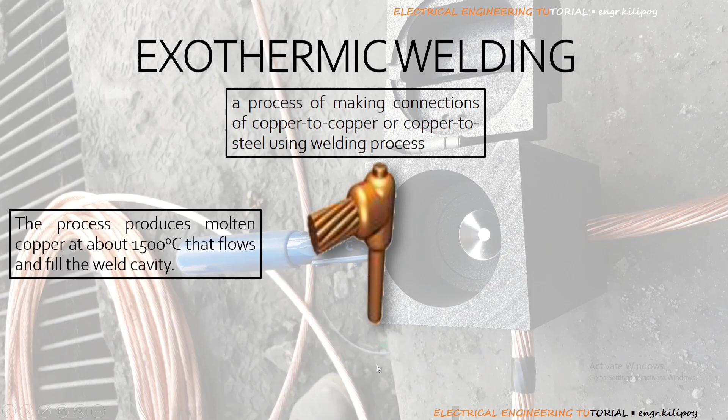...connecting the interconnection of the grounding cable or grounding conductor, and grounding conductor to grounding rod. This process produces molten copper at about 1500 degrees Celsius, which flows through the weld cavity. We will show later how it flows into the weld cavity. It has resistance to galvanic coupling and greater mechanical toughness.

What is galvanic coupling? It is a condition where two grounded systems are connected at multiple points, causing galvanic coupling. When you have galvanic coupling, there is a voltage difference between grounds, and given that voltage, there will be unintended current flows, which is very dangerous.

With exothermic welding, it resists that galvanic coupling scenario. The connection produces a molecular bond, called exothermic bonding, and that will not degrade over a long period of time.

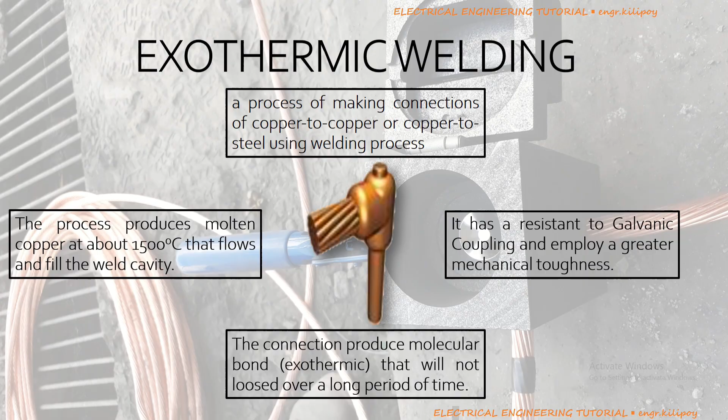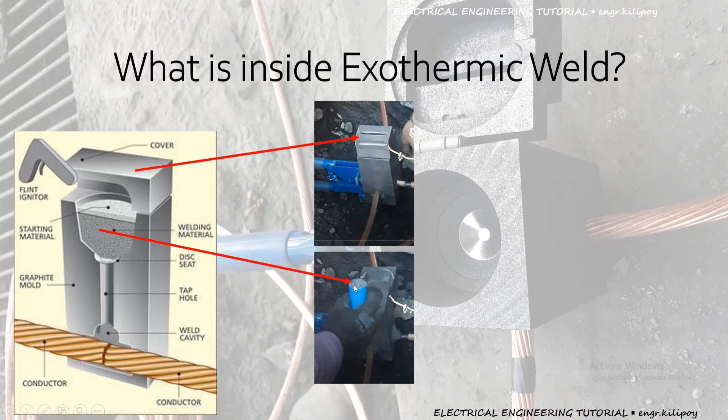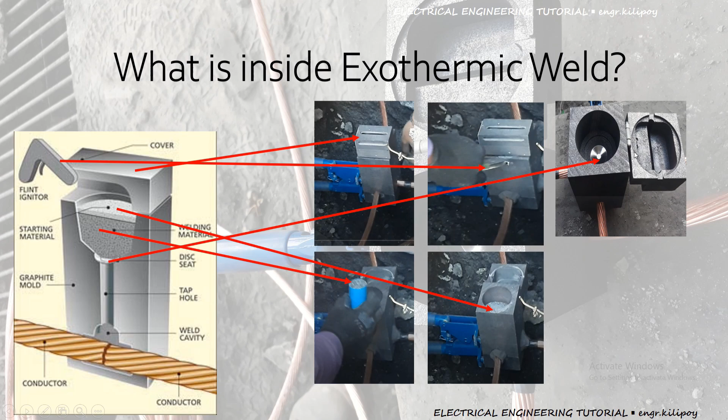Then we have the flint igniter, which starts and ignites the welding material or starting material. We have what's called a disc seat where the welding materials and starting material sit, to prevent them from flowing into the welding cavity. The welding cavity is where our conductor is placed - molten copper must go there to form the exothermic weld.

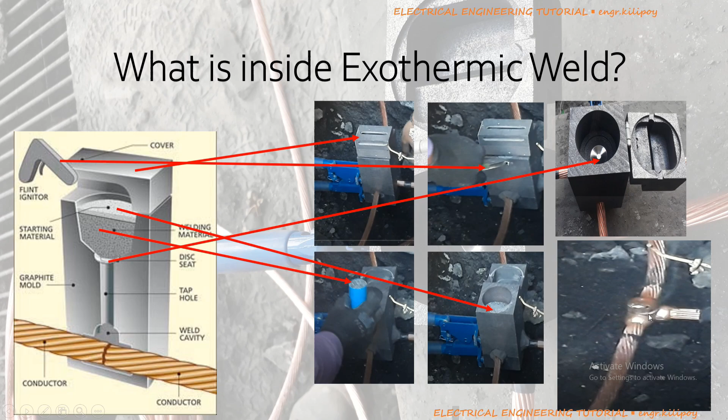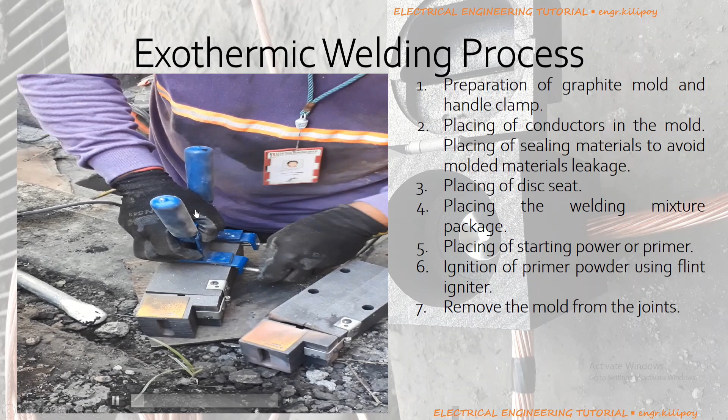So here, we prepare the graphite mold and handle clamp. This is the graphite mold, this is the handle clamp. Then we place the conductor in the mold - placing our grounding conductor in the mold. We put electrical tape so it doesn't open up, and so it sits properly in the molding.